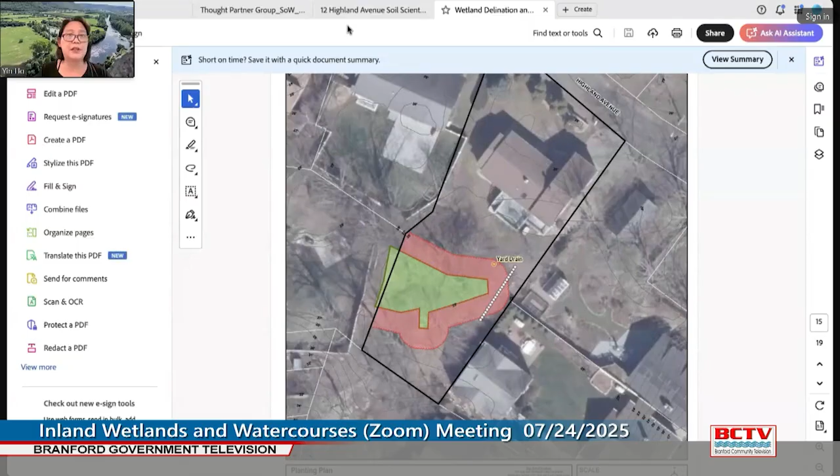In the back of the property, there is a very small wetlands, so small that it's about 35 feet at the furthest, and then maybe like 12 feet at the narrowest point. I think, Katie, if you want, I can pull up the map just to kind of give you a sense of what it looks like. You should be able to screen share if you would like. But I actually have the photos pulled up that you had. Oh, you do. Yeah. All right. Never mind. Then I will stop sharing and I will let you share the photos. I'm sorry about that. No, don't apologize. It's fine.

So just to explain, behind my father's, and I'll just call it my father's, even though I also am an owner of this property, in the backyard there is a very small wetlands. It's a little bit of a depression, and we had a soil scientist. We had Matt Davison from Davison Environmental come out and measure it and sample the soil. This will be the second time that the soil has been sampled. The last time it was done was over 20 years ago, and the size of the wetlands has gotten a little bit larger over time.

Part of that has come from the fact that the water in that area has increased. There have been some trees that have been taken down. Basically, the water had no place else to go because it is the lowest point in this backyard. But it is an interesting little small wetlands with a lot of wetland plants. There are about 55 different species of plants in there. A number of them are invasive, but a number of them are wetland plants.

And my father has been wanting for a long time to turn the backyard into a garden. The first step that had happened was there were a number of trees that had been cut down in a resident property, and the water line started to go a little bit closer to the house. The first thing my father did was to plant some grass. Did not actually touch the wetland area. That was actually confirmed by Davison Environmental, and that was just a bit of grass coming from the house out to just about within 10 feet of the wetlands itself.

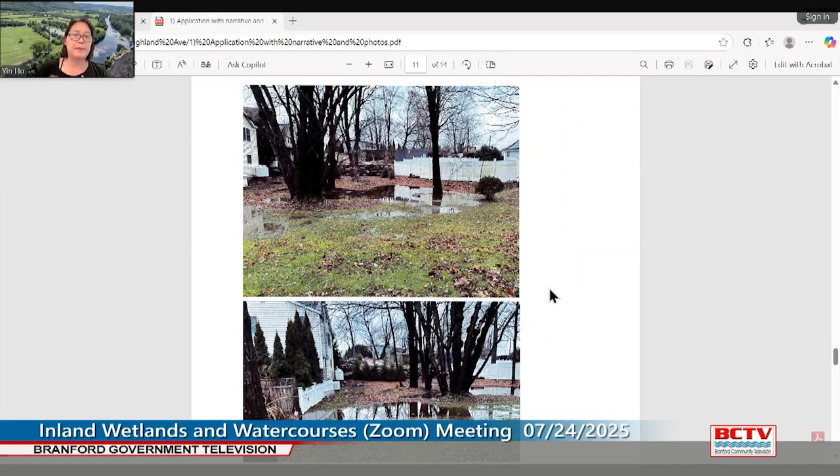Katie, if you can showcase, I think there's a map in the Davison Environmental. Oh, look, you can see this is in the winter. You can see there's a lot of water that fills up in the space. So it does have a little bit more expansive look, and you can see how it can run in a lot of directions. And then toward the very end of this application, Davison Environmental also provided us a little map that shows the wetlands itself. I think it might be document number 2, Katie. Yeah. So if you start to scroll, in here it also describes all of the plants that are currently there.

And you can see the photos are very similar. This was taken on May 29th, on the soil. But what I'd like everyone to be able to see is go a little bit further from this map. It's the map underneath this where you can sort of see that this is kind of the wetlands itself. The house is up here to the right, I guess you would say sort of to the west of it, or I guess more to the east.

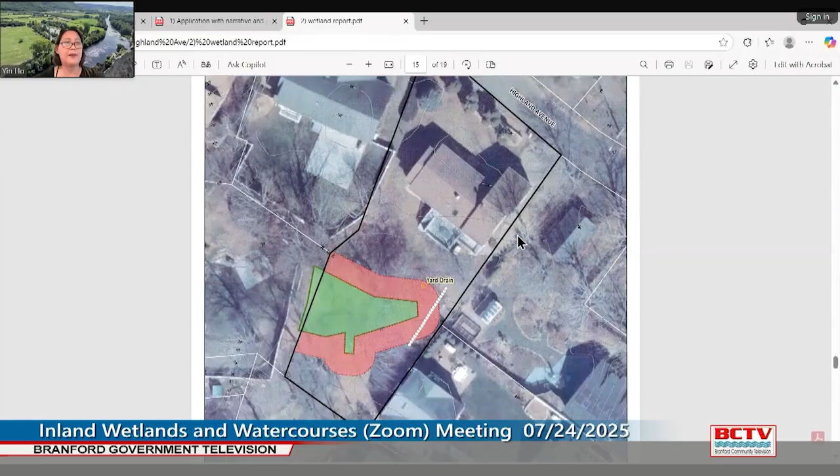And you can see that the yard is pretty large, and the wetlands itself does take up a portion of it. But if you can see the borders of it and consider the fact that we can plant plants around the borders and actually plants on the inside, we'll end up with a really lovely wetlands garden as well. Anyway, I don't know if there are any questions, but thank you so much for giving me the chance to present this.

This is Commissioner Basserman. I looked at the application, and there's quite a bit of detail regarding the soil and the proposed plantings. Who actually will do the work? So Davison Environmental employs a botanist, Aubrey Karajan, who actually has worked with us on the restoration of Rockland Pond, and so she will actually be working with us, and then my gardener will work with her. So that's how we're doing this.

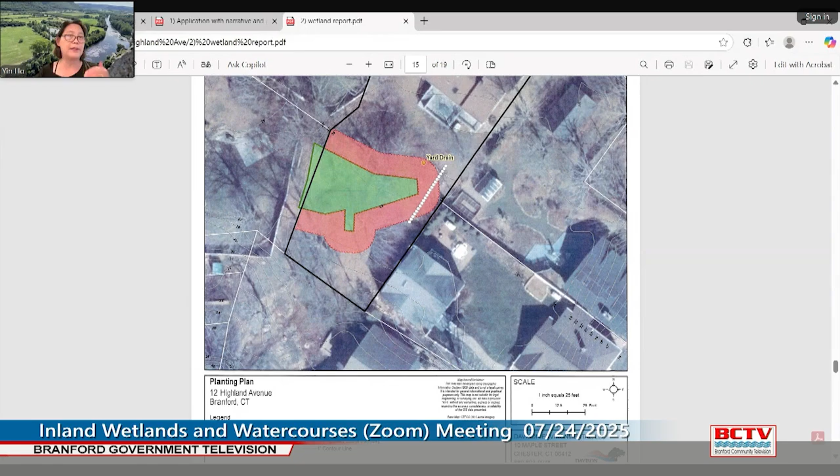It will be under her supervision, and she's procuring for us all of the plants that are listed in the table that's at the end of the application. And there are quantity numbers next to them as well. They look about 18 to 20 at a time. I think, Katie, if you could drop down a little further, I think you'll be able to see, like, these are some of the flowers or some of the plants that we're looking at right now.

And then the numbers actually are in a different table. I apologize, they're in a separate table, but they are in the table here. I think it might be a little further up. Oh, or further down, actually. Let me see if I can find it too. That should be it. Yeah, there we go.

This is Commissioner Basserman, and the funding for this is provided how? It's purely provided by my father and me. So this is something we will privately be paying, just as we privately paid for Davison. Thank you.

This is Commissioner Goklowski. I think it's great what you're doing. I understand your rationale. My concern is in the wintertime when I saw the flooding on the property in that area, are you concerned that those plants are going to die off from having too much saturation, or any concern in that way?

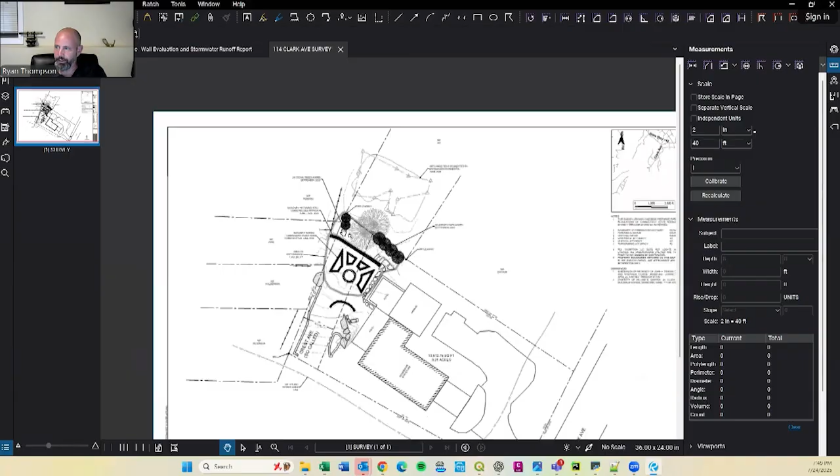And then the violation was in regards to some plantings, which involves a couple of cedar trees here, some arborvitaes here. This is the masonry retaining wall that was asked to be evaluated, and then the associated masonry stairs here, and then these raised masonry planters in the garden. And then this line indicates the location of the disturbance, where behind this retaining wall there was a perforated PVC pipe placed in there and some gravel fill material.

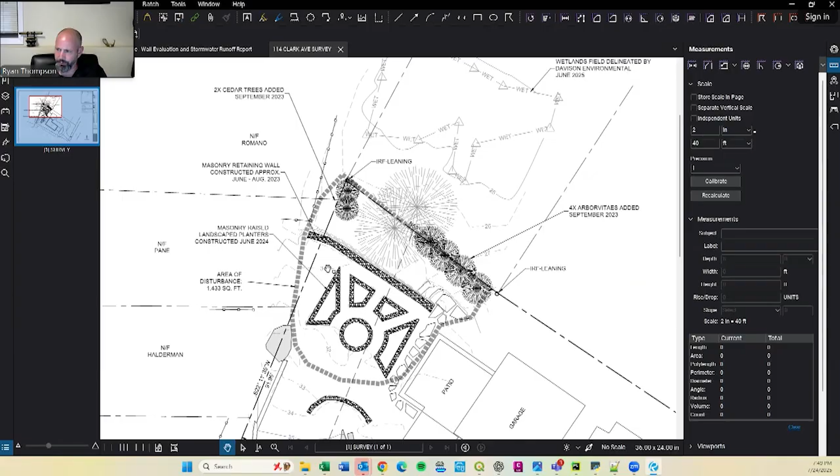So this is the area that is in question regarding the violation. So now that you've kind of seen that, I'm going to go over to the report and address the specific things that Ms. Dufour was asked by this commission and that I was retained to do. So I did conduct a survey. Here's the general time and everything. I did that on June 17th, approximately 10 a.m.

And I just wanted to note a couple of things. One, the most notable significant rainfall prior to that, I wanted to make sure that I accounted for that, was about 2.5 or maybe 3 weeks earlier, May 21st to 24th, where there was about 5 to 7 inches total. There were some smaller rainfall events after that, but they were 1/4 inch or 1/2 inch max. So when I was there, the ground was pretty much dry. There was no standing water and no evidence of any erosion or excessive runoff.

So I had a conversation with Ms. Dufour on site. She advised me that the various things that we just discussed on the map were built in phases over roughly a year, starting in the summer of 2023 around June. That was the construction of the masonry retaining wall, and then the pipe and the gravel backfill. Then later that summer, right before fall, planting of the arborvitaes and the cedar trees. And then the next year, construction of the raised landscape planters on top of the backfill. So that's the general timeline of the events.

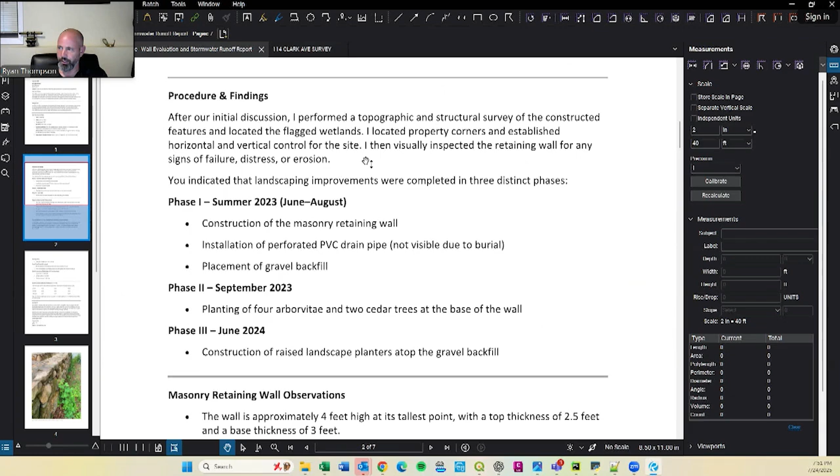And this, I understand, is what the previous applicant was referring to, I believe, with the increase in runoff, and was one of the reasons why the violation was brought up, and the need to look into the runoff.

I want to talk a little bit about the masonry retaining wall. So I did evaluate it from a structural standpoint, and while I am a civil engineer and a land surveyor, I do have a somewhat significant background in structural engineering. I actually worked for the Virginia DOT in the structural materials division for a number of years. I do soil design, foundation design. So I have the appropriate knowledge and ability to analyze such a wall. I wouldn't call myself a high-rise building designer. I would never try that. But for something like this, certainly acceptable.

So the wall is about three to 4 feet high. At its highest point, it's about 4 feet. It's about 3 feet thick at its base. The stones are roughly half a foot to 1.5 feet in diameter, maybe a little plus or minus. There's no sign of any movement, no sign of any distress. There's no evidence of any concentrated ponding of water at the base of it, no efflorescence coming through the rocks. There's no grout movement.

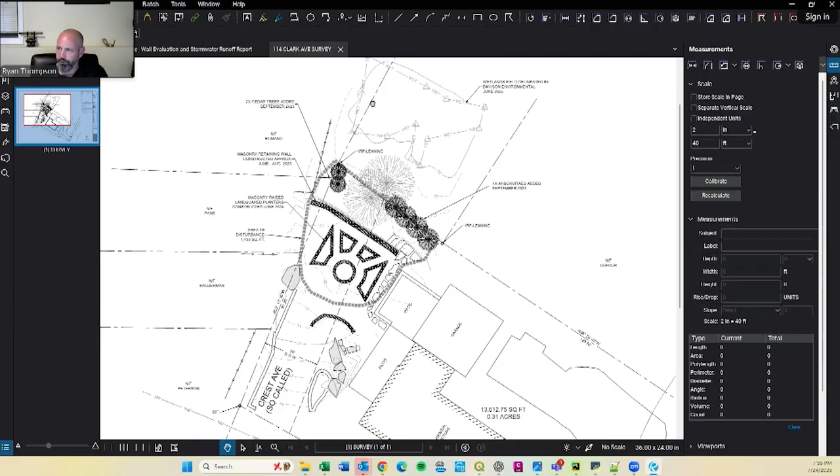It's not impacting any of the neighboring homes, i.e., it's not getting into the basements. It's not flooding out the residential structures around them. They're all higher in elevation, and I'll actually show you that. Well, it's not super easy to see here, but you can see the contour lines are going around it.

This is the depression. This is the same thing the previous applicant was talking about. This is the lowest point in all of the areas around it. So it does go here, and then eventually either evaporates or infiltrates into the ground. Even during the peak runoff in the winter, you could see it wasn't actually in the neighbors' buildings. I mean, it was in the yard, but it's consistent with the numbers that I calculated.

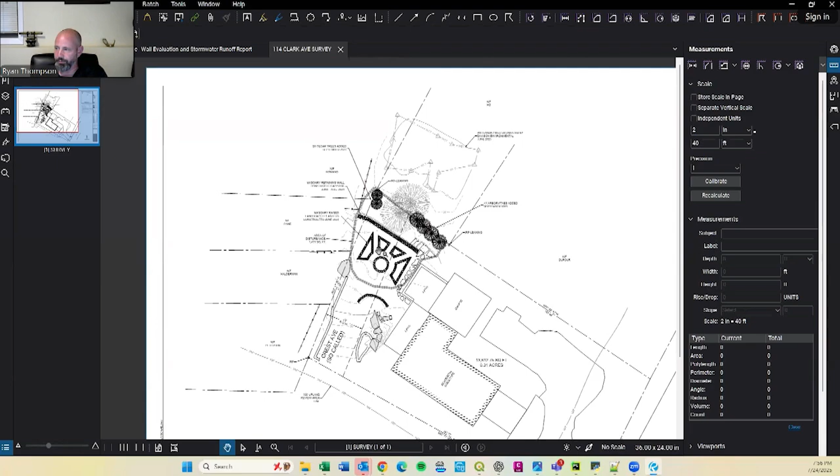So that is, I believe, the specific request of what I was asked to do, and I'm going to let you ask me any questions you have at this point.

So this is Commissioner Botta. Just to clarify and summarize, you're saying yes, it increased the volume in that wetland. The flow rate. It increased the flow rate. Yes. The flow rate and the total volume, but because it is ponded there and it's not getting to the house or their basement, it's not a problem.

Well, I'm not going to speak on behalf of the neighbors, but I'm going to be clear that the amount of increased runoff is not encroaching into the structures. I think that's the best way to say it. Now, into the yard, yes, that's happening. It's not going into the basements. It's not going into the structures.

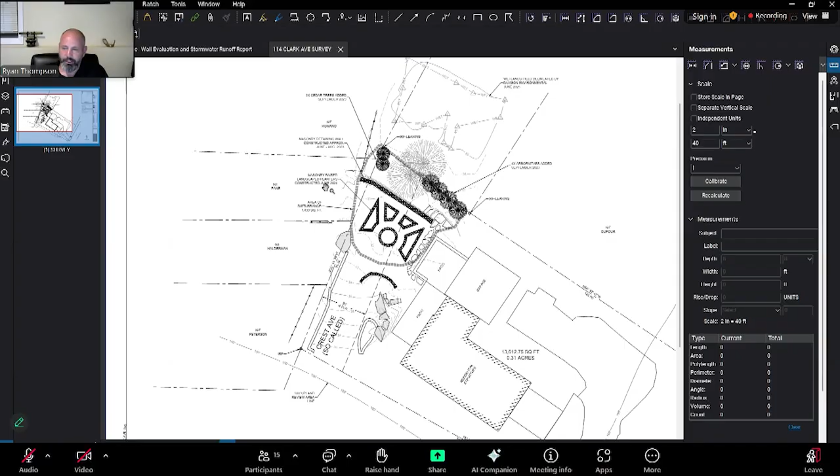The amount of increased runoff is, again, a couple of garden hoses of increased water. Obviously if we put two garden hoses and let it fill into an enclosed area, it's going to fill up. But once the rain stops, it's going to evaporate and it's going to infiltrate back in the ground, which is exactly what we see. And like I said, when I was on site, and in fact, you saw previous pictures, and I'll show you. I actually meant to show you some pictures here.

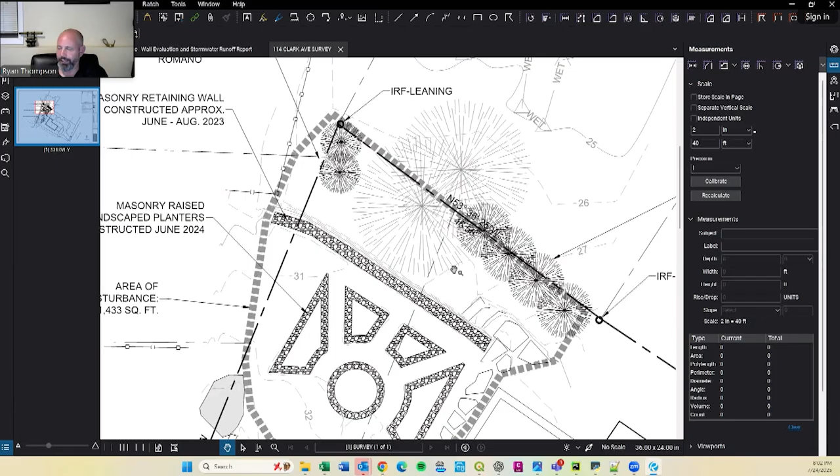And so this is the base of the wall, and this is essentially acting in its own right as an infiltration rain garden. Now, it's not an engineered one. It's not a designed one with specific plantings. But what's happening is as the water comes through the gravel, around the end, it sheet flows across into the wetland system. During this sheet flow application, a portion of it, some percentage, maybe 5, maybe 7, is infiltrating.

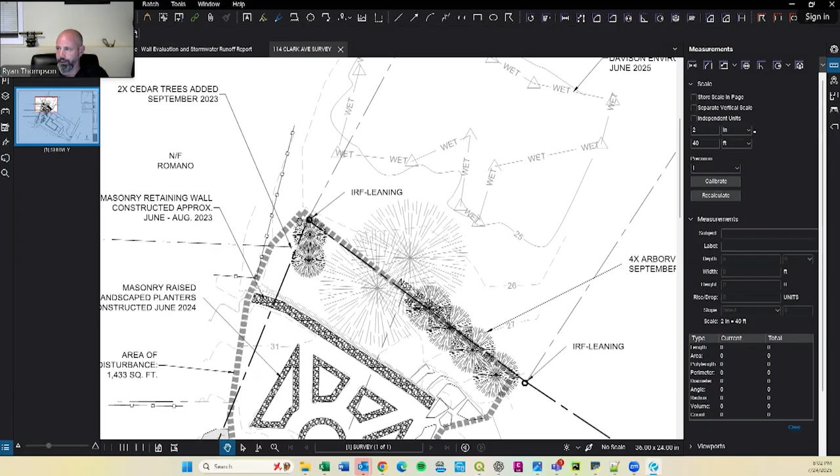A portion of it, maybe 2%, is evaporating, and then the rest of it collects in the natural system, which, as you heard before, has probably grown to some degree as a result of this. And then the natural system does the rest. It infiltrates it. It evaporates it. It gets taken up into the plants, and all into the natural occurrence.

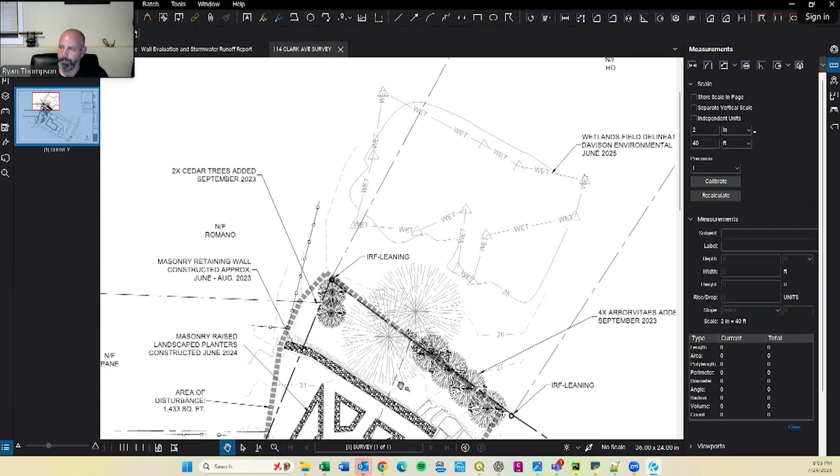So your question being, would we treat it somehow here? If this was a lot more runoff, absolutely. But for what we're talking about, I think you do more damage digging this out and putting in plantings here, putting in silt fence and all that, than letting it continue to sheet flow into the natural system right downstream.

Again, I'm not an environmental scientist, and so I don't want to pretend that would be the solution. That wasn't what I was asked specifically to address. I went over the things I was specifically asked to address, but that would be how I would view it. I hope that helps.

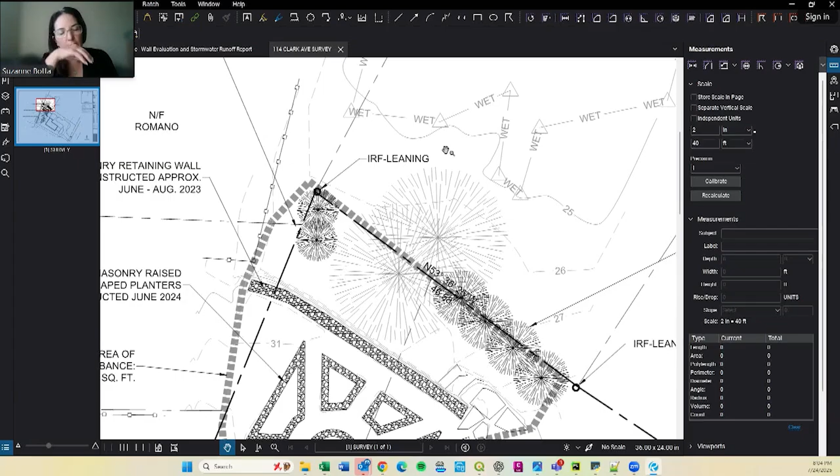It does. So again, this is Commissioner Botta. When we have any new application, any impervious surface that's added, the requirement in town previous to the revised regulations was the first inch was captured. The new regulations are the water quality volume. And it sounded like you gave some, I don't know, maybe back of the envelope calculations for what was infiltrated versus what runs off.

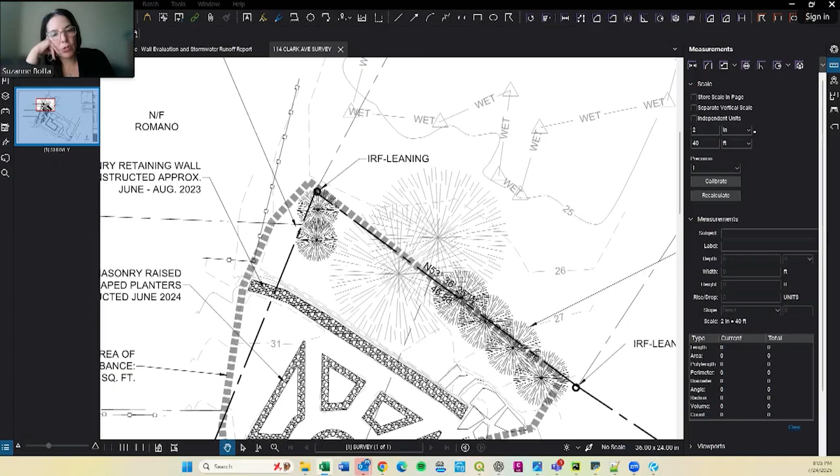I think what I'm really trying to understand is what you're estimating as infiltrating. Is that the water quality volume? Do we know what that quantity is? And I understand what you're saying about overland flow versus infiltration and not wanting to redisturb the ground.

At the same time, as a regulatory body, I don't want to ignore what our regulations are or the spirit of the regulations, because it's already done and it was done without an application. And so therefore, because it was done without the application, they didn't have to follow the standards that are set forward in the regulations for when people do things in a traditional order.

So I guess the heart of the question is, do you know if what is being infiltrated is either the first inch from that impervious or semi-pervious material, or the water quality volume? Yeah, so I just, while you were talking, so the first inch is 114 cubic feet.

So if you use the 5 inches per hour rate, that's the maximum allowed for Connecticut for infiltration volumes, that 114 cubic feet would essentially be infiltrated if you kept it in a trench the length of the base of the wall, right? At the length of the wall. And that trench was 5 feet and it was 3 inches deep. That 114 cubic feet would be infiltrated in less than an hour. I'm sorry, I think I said inches.

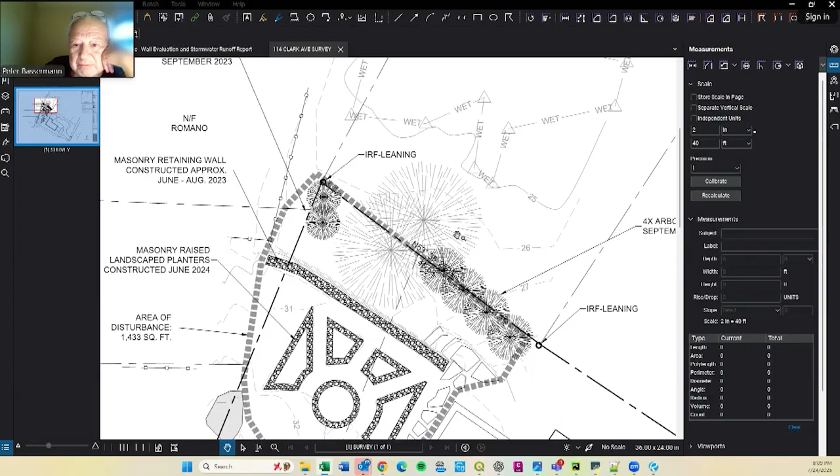If we say we're going to leave the property and impact the neighbor's property, admittedly, maybe not to a large degree, but we know that we're getting more intense storms. We're getting more frequent storms. I think we need a better understanding of trying to retain as much of this runoff on site as opposed to letting it travel. So calculations that could indicate what you would do to retain that on site would be helpful, I think, for future discussions on what we do here.

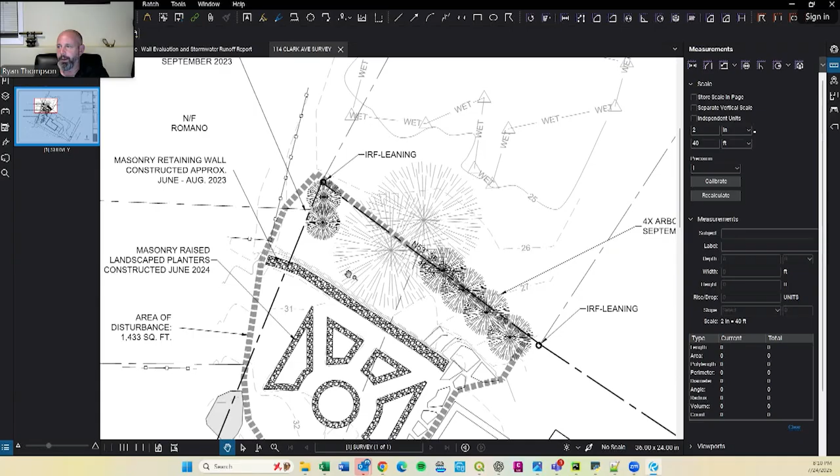Yeah, I certainly can put together a plan. Basically, I would just show right here at the base. I'd put a strip of basically like a rain garden, probably 5 feet wide max, and a very slight depression, showing the volume that would be infiltrated there. And I understand your comments, certainly.

I do want to point out I did use 5-minute duration, which is the most conservative value, right? So a 5-minute duration storm is not the most intense, but it's the most realistically intense, and it's a very common duration event to use the values for, which has 4.96 inches per hour rainfall. If you think about that, that's a very violent thunderstorm, and that's in the 2-year.

And then I'm even using 11.6 inches per hour of rainfall, which is a lot. And yes, we do see them. They are increasing, but even at these very high intensity rates, we're seeing a couple of garden hoses worth of increased runoff.

Jamie Frederick, Inland Wetland Agent. So I just want to highlight real quick a couple of points. One is when I issued the notice of violation, the property owner was very quick to respond and invite me out on site to take a look at things. I was, I guess you could say, lucky in the sense it was raining really hard when I went out there. And it had been for a couple of hours.

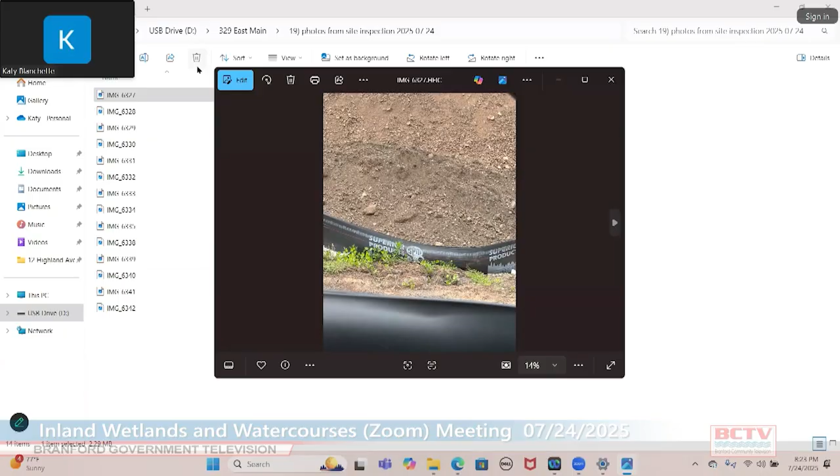Yes. Okay. Thank you. So this is one of the silt fences that is around the dirt stockpile. It looks like they had started to do some additional work, and I'll get to another picture. But they started adding soil kind of in front of this, and it looks relatively fresh. So it looks almost like they just dumped it over the side of the silt fence. So, anyways, this silt fence needs to be addressed before it overtops.

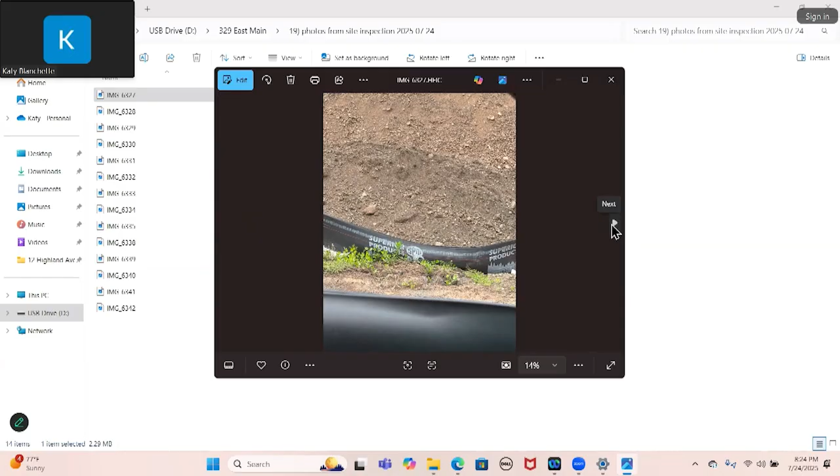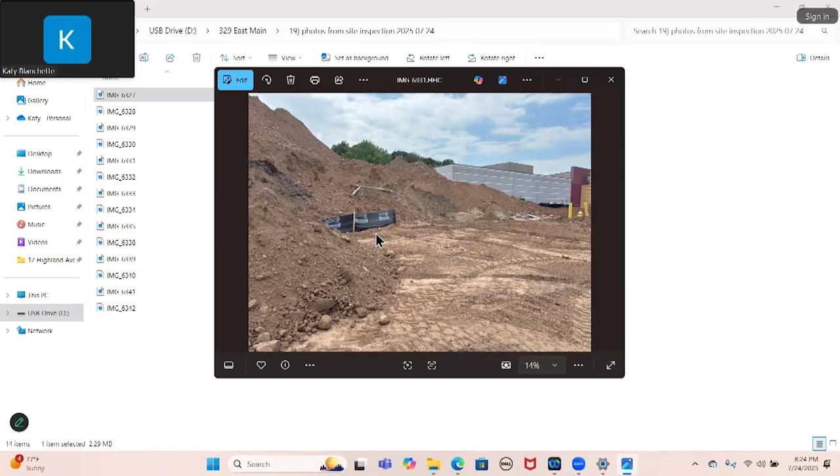This one as well. This is around the millings pile that we had discussed at the last meeting, and as you can see, there is now a cover over it, but there is some bowing of the silt fences there. This is the extra pile that I was talking about. They started kind of making another pile in front of the silt fence. This does not have any protection around it. And then, as you can see, it just kind of stops. And then this is that offending pile that I just discussed.

So again, this is the millings pile with just this section of silt fence. It looks like the rock fell and is pushing down the silt fence. There was some trash on the backside, actually on the eastern side of the property, that should be addressed at some point before it makes it through into the wetland behind there.

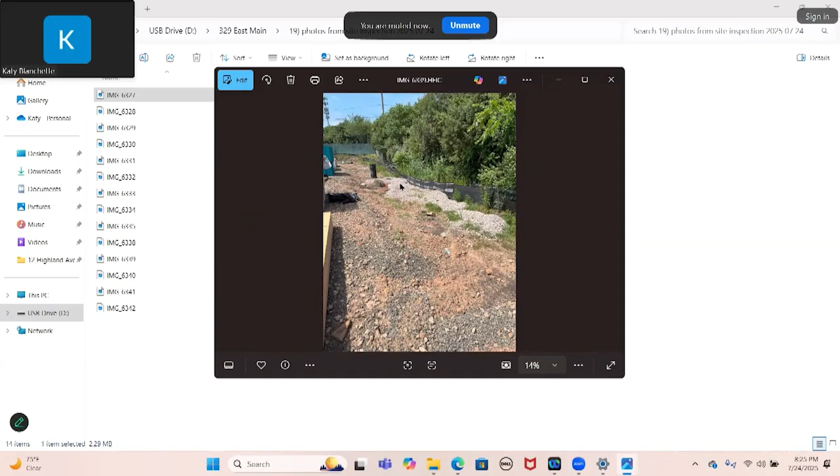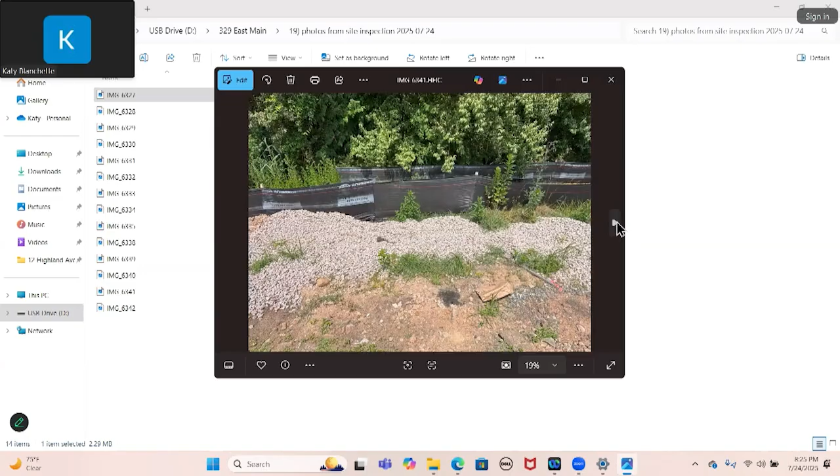And then this was a rock area that we had been previously concerned about pushing up against the silt fence, and it looks like they moved the rock, so it's no longer bowing there. So that looks good. And that's it. Any questions? Oh, I think you captured a number of things. Maybe let's turn it over to the applicant and see what the response is.

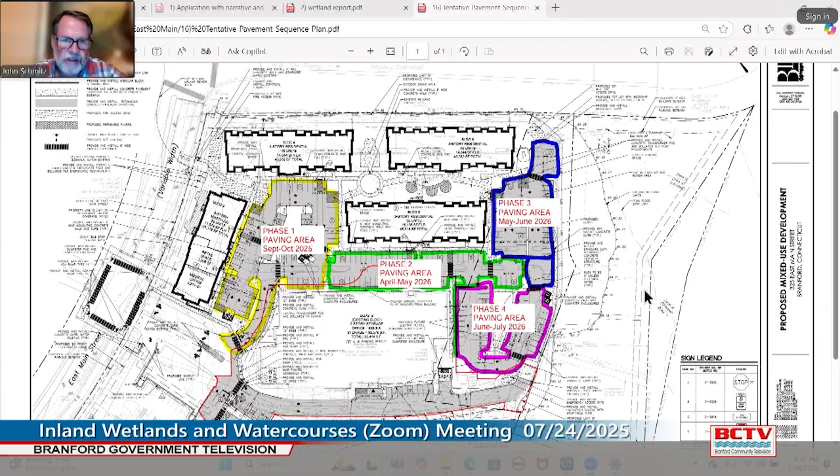We also submitted just a quick copy of two things. One was a plan showing potentially how the site would be sequenced as far as paving goes. And then another just kind of summary of typical placement, how material is placed, how paving is placed. But just with regard to the paving, the building that's under construction now closest to Route 1, that's building 3. So thank you for sharing. That is on the left-hand side of the screen.

So we've identified phase number 1 paving area in yellow. That's the area associated with building 3. So that would be the area that would be paved first. And in speaking with the contractor, the plan would be to get that material down September, October of this year. It potentially could slip into October, November.

I would note that as far as paving goes, we're at the mercy of the batch plants that make pavement. They close typically around Thanksgiving, but it depends on the weather, the temperature, and then they usually open up around March 1st or so. So operations for paving are usually scheduled in the fall or the spring and the summer, obviously not during the winter. So the idea would be that this area is paved this fall, and then the other areas would come back in the spring and summer of next year to finish up.

And that goes as well as the other buildings would go as well. But this is just kind of giving you a sense for how the residential portion of the project would proceed over the next year. So that's really all I had. Again, I'm happy to answer any other questions.

Commissioner Bono, this is helpful. And so just to clarify that the idea is that for the phasing, or maybe you want to talk through the narrative, but the millings would stay piled except for what was going to be pulled. So for example, for phase 1, they're only going to take the millings that they need for phase 1, lay those down, then put the new asphalt mix on top. Phase 2, 3, and 4 would not have the millings put down until it was ready for asphalt shortly following.

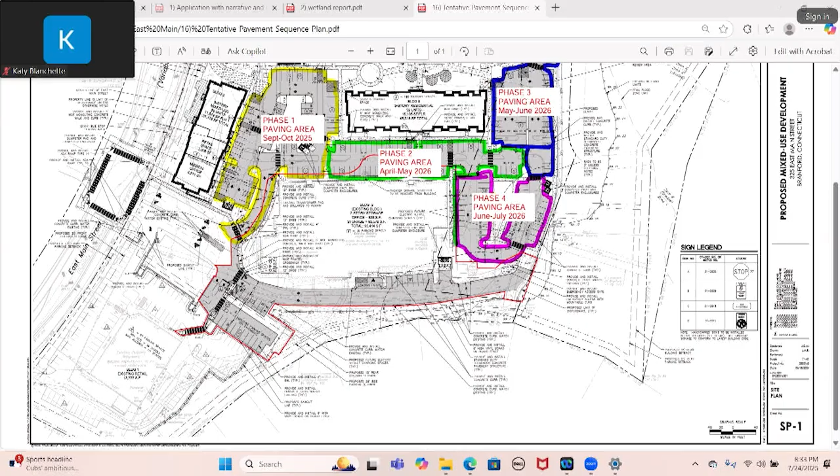Just for context, relatively speaking, the current location of the millings stockpile is right about in here. And again, it's covered and it has the silt fence around it. And then those other dirt piles that I had showed are in this area here, along here. Yeah, I haven't been to the site this week. I'm not sure what those new piles are. They may just be temporary, which may explain why there's no silt fence around them, because silt fence would usually be applied to a stockpile area that's going to be in place for a while. So that may just be some material that was placed on a temporary basis until it's moved somewhere else. It could very well be. It was there when I was there, so I figured I would add it in.

Is there a standard definition of temporary? I think as far as DEP goes, they look at something as less than 30 days, because the requirement would be anything over 30 days would receive top dressing and it would be planted. So for instance, if we had a topsoil pile and it was going to be there more than 30 days, we would have to put grass seed on it and try and get some vegetation on it. So usually less than 30 days. Thank you.

Jamie Frederick, the wetland agent. I have not been out to the site recently. However, Katy did go over her findings with me earlier and also, of course, just now. To me, it sounds like a lot of the corrections that need to be made on site are maintenance based, and no active failures are on site at this moment. There are definitely some typical problems, but the maintenance of the erosion controls, the bulging around the stockpile, those are the kind of things that contractors generally let slip first because they don't see it as important, which isn't the case per se, but if something's going to be left behind, I'd rather it be the silt fence around the stockpile and that the exterior controls are being maintained.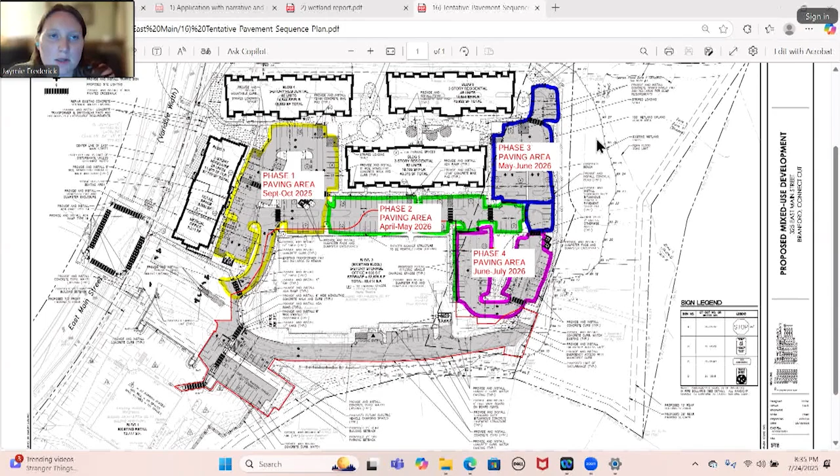So I think the problems that were outlined in Katy's overview and the erosion control reports are things that the contractor should be addressing through receipt of those reports, and through open communication we should be able to get those things addressed. Any other comments from the commission? Okay. Thank you for the report.

We're up to CC. Wait, Jaymie Frederick, the wetland agent. Before we move on, does the commission want to take any action on the order? Do you want to keep it in place and have an update at a later time? If so, what are the target things you're waiting to be addressed? The erosion control reports that we're receiving are part of the permit itself. So if the commission were to determine the order was addressed, we would still be receiving those reports. And of course, if anything else came up, we would bring a new cease and correct order back, unless there are specific things the commission wants to follow up on in regards to the current order.

This is Commissioner Goklowski. They've covered the pile. That was a pretty big point right there, and they have established the erosion controls. And I'm sure, Jaymie, that you're going to continue monitoring the site. I don't know if it's necessary to keep it on our agenda at this stage of the game, and if there's an issue, it can come before the commission again. If they're doing what they're supposed to be doing at this time, I guess we can just do a wait and see. There's nothing they're going to be paving in the fall, and any paving is not going to start until next spring.

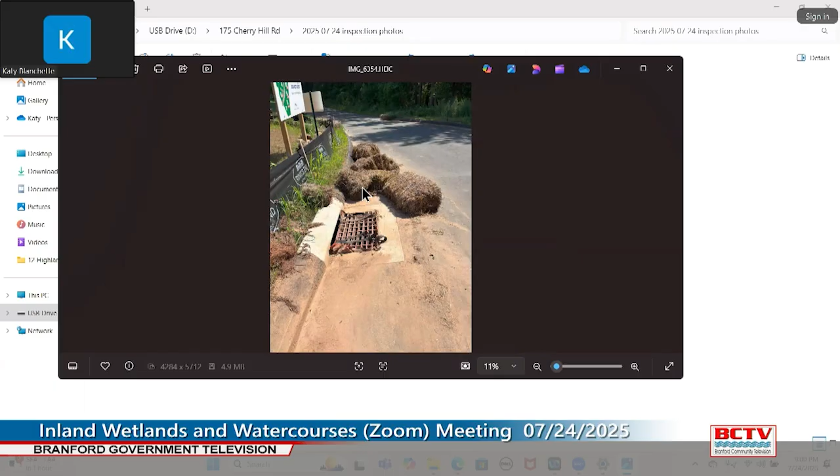Again, another empty silt sack. This is across the street, so I guess it would be on the southwestern side, I think. Yeah. And there was just a little bit of standing water in there, but it wasn't bad at all. And that's it. So overall, it was pretty good today.

So Jaymie Frederick, the wetland agent, the cease and correct order was issued because sediment was getting to the watercourse further down Cherry Hill Road. It was getting there down along Cherry Hill Road, running along the curb line. Well, it's not a curb, the shoulder of the pavement, if you will. And also there was some seepage going through silt fence on the rear of lots 8 through 10, because the silt fences were loaded and the load was likely stretching the material and allowing for fines to get through.

So since the cease and correct order has been issued, there have been a lot of corrections made on site. There's been a lot of stabilization, both through intentional efforts, as Katy pointed out, with the matting and the sprinklers on the slope there, and then also just through kind of seed bank material taking over a little bit in the spring on some of the more open areas on lots that have not been developed or started to be developed yet.